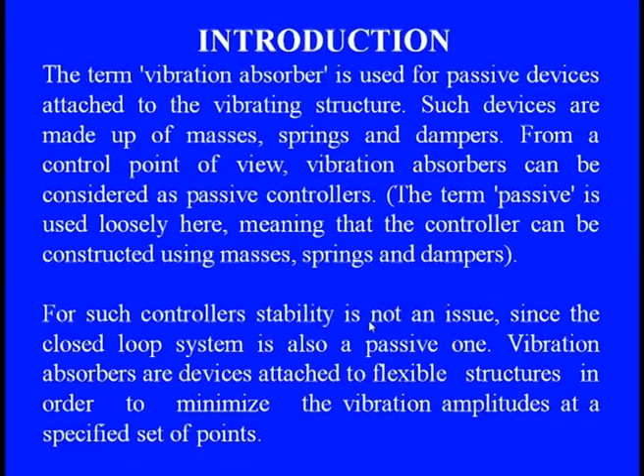Vibration absorbers are devices attached to a flexible structure in order to minimize the vibration amplitude at specific points or a specific set of features. So when we are striking a localized region of the machine or an object, these passive structures which are added there are effective, and through this system we can at least suppress or absorb the energy of the vibration.

The design of this vibration absorber has a long history, starting in the early 20th century with Den Hartog. He introduced the idea that was proposed by Frahm, one of the scientists, who asked why we can't adopt these things to suppress vibration. He simply assumed a second mass-spring device which is attached to the main device.

In this model, there was already a system, and a mass and spring is to be attached there. It simply prevents vibration at the frequency of the sinusoidal forcing from the main device. So this mass-spring is put in place to eliminate whatever vibration features or transmission is coming from the machine to other parts of the system.

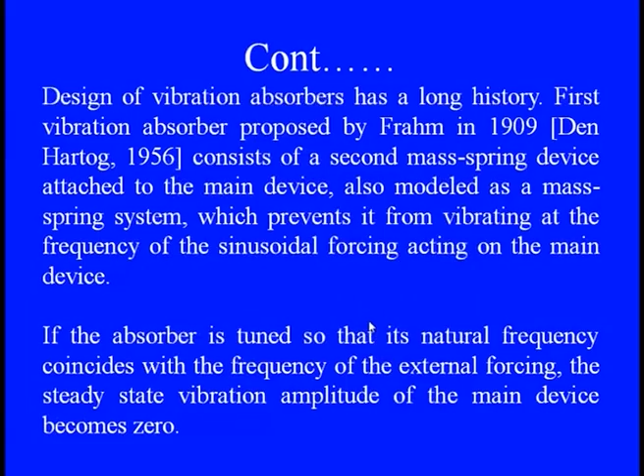If the absorber is tuned, that is one of its specific properties. If this absorber is exactly tuned so that its natural frequency coincides with the frequency of the external forcing, the steady state vibration amplitude of the main device becomes almost zero, because then the entire energy goes to the absorber since it is now tuned with the entire system's frequency.

When we think from the controls perspective, the absorber acts like a controller that has an internal model of the disturbance, which therefore cancels the effect of the disturbance outside.

This is one of the basic mechanisms working from the absorber to the device, because whatever internal disturbances are there, when resonant conditions appear, it clearly absorbs the entire amount of energy being transferred from the main device.

The vibrating system generally consists of a mass linked to the structure by a spring and a damper, and the vibration absorber is set up in such a way that the mass can vibrate at a specific frequency close to the main structure, which I am going to show you in the next slide.

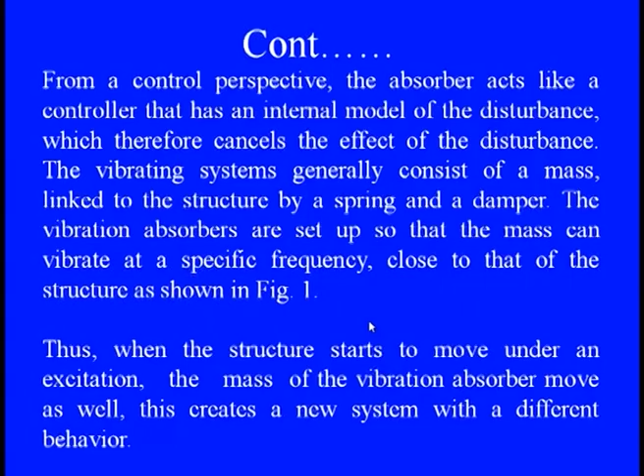When the structure starts to move under excitation, the mass of the vibration absorber also moves with the same structure, and this creates a new system with a different behavior.

As you can see, when the entire absorber covers the mass and spring and is attached to the basic system, whatever forcing frequencies are there, like f sin omega t or cos omega t, it goes straight toward the absorber part, which consists of the mass and spring together, the undamped system.

So whatever frequency is there from the exciting system goes toward the attached absorber mass, and when they are tuned to each other, the entire energy is absorbed by the absorber mass.

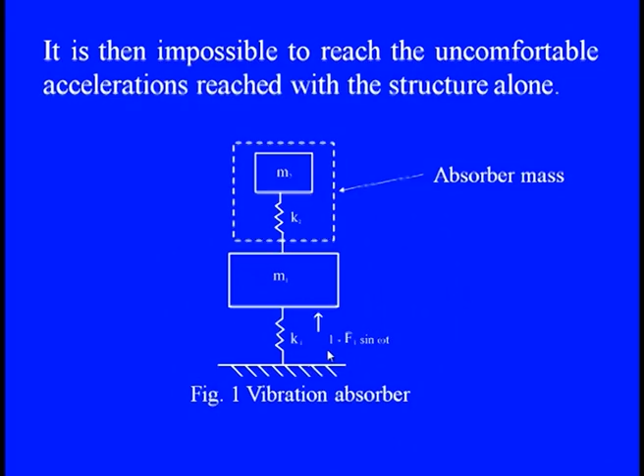So it is then impossible to reach an uncomfortable acceleration within the structure alone. This is the basic concept of the vibration absorber, which is attached to the basic structure.

When there is a main machine or main component, the vibrating mass which is under a sinusoidal force, say f0 sin omega t, acts on the undamped system in which the mass and spring are present.

We can say that when the forcing frequency equals the natural frequency of the main mass where the force is being exerted, the response is infinite because of the resonant feature. When these situations occur, we know that severe vibrations are produced.

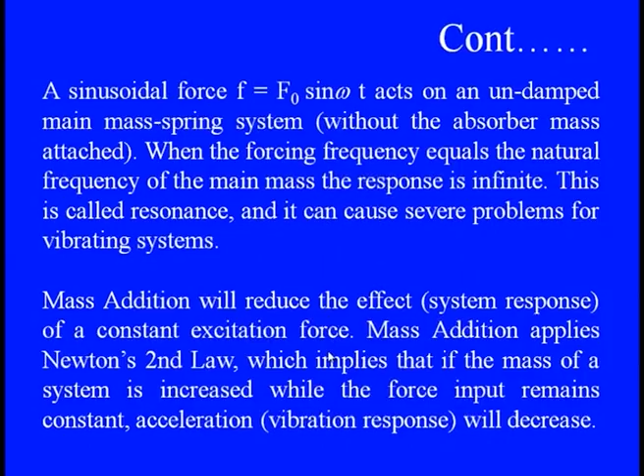So when we are adding mass to the system just to reduce the effect of this vibration, at the same excitation forces, this particular mass through whatever attachment is there through the spring is absorbing the entire energy according to Newton's second law, which says that if the mass of the system is increased while the force input is the same, then the acceleration will decrease, since force equals mass into acceleration.

We know that we are not changing the mass at the point in time when the force is acting and the excitation is coming. But on the other hand, with the same force, when we simply add mass, certainly the acceleration should be reduced. So when such things happen, we can straightaway use this increase of mass feature.

So when an absorbing mass-spring system is attached to the main mass, the resonance of the absorber is tuned with the main mass, and the motion of the main mass almost reaches zero at the resonant frequency. That means whatever energy or excitation amplitude is created at the resonant condition is absolutely absorbed by the attached spring and mass.

And the energy of the main mass is apparently absorbed by this tuned dynamic absorber feature. This is one of the interesting phenomena in the motion of the absorber, and we can say that at the resonant frequency these absorbers show their finite behavior under the steady state feature in absorbing the entire energy.

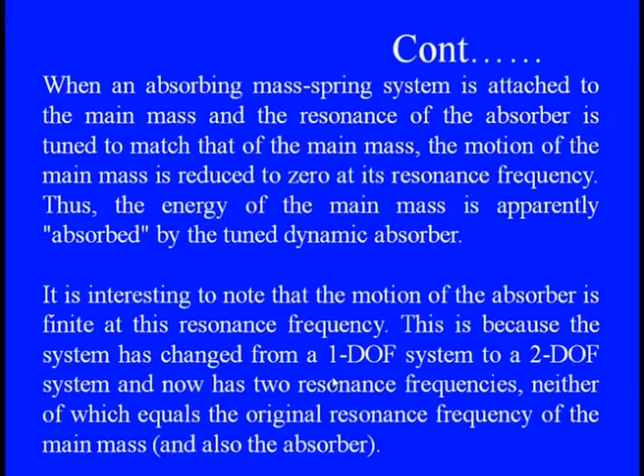And it is so because we know that when the system changes from 1 degree of freedom, with the single mass, to 2 degrees of freedom when the mass and spring are attached, now there are two resonant frequencies, and neither of them is equal to the original resonance. So when there is a shift in frequency, the resonant feature of the entire system, converted from single degree to 2 degree, is brought down.

So this is the basic physics in vibration: when something is added as mass and is tuned to the basic system, the entire system frequency is shifted, as per Newton's second law.

In such devices, which have this inherent nature because of their rotation and other components, we need to add these kinds of masses just to shift the frequency and control the entire vibration by tuning the additional mass.

But with low natural frequency isolation, when we are trying to isolate a system that excites at low frequency, this isolation requires a large deflection isolator such as a soft spring. And the soft spring can be used to control the vibration, which can then lead to some rocking motion, because ultimately that energy has to be exchanged. So that is not always acceptable.

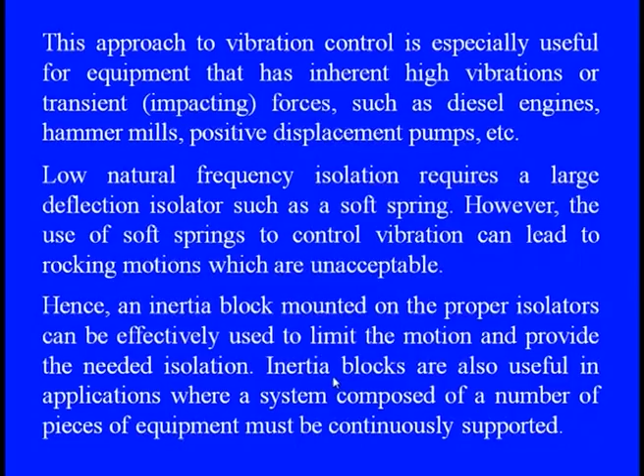So inertia blocks are always useful in applications where the system is composed of a number of pieces of equipment, and they continuously support the entire system for vibration generation, and even in the transmission they continuously play their key role.

So, like we are saying, there is one example in which various such things are there, and we want these small masses to be settled in a continuous way.

So inertia blocks need to be put in place because they lower the center of gravity, and once they lower the center of gravity, we know that the axis of rotation and the moment of inertia axis settle down.

This offers some additional feature of stability, and by increasing the mass, they decrease the vibration amplitude, and also decrease the rocking or exciting feature of the entire system. Due to this, there is a minimization of alignment errors because of the inherent stiffness of the base. So we can say they are also acting as a noise barrier between the floor on which they are mounted and the equipment to which they are coupled.

So when we talk about this system in which the isolator or absorber is present, acting as an inertia block, and also as the vibration controller while maintaining stability, we can write the equation of motion as m1 x1 double dot, which is the inertia force due to the vibrating mass, and k1 x1 and k2 (x1 minus x2).

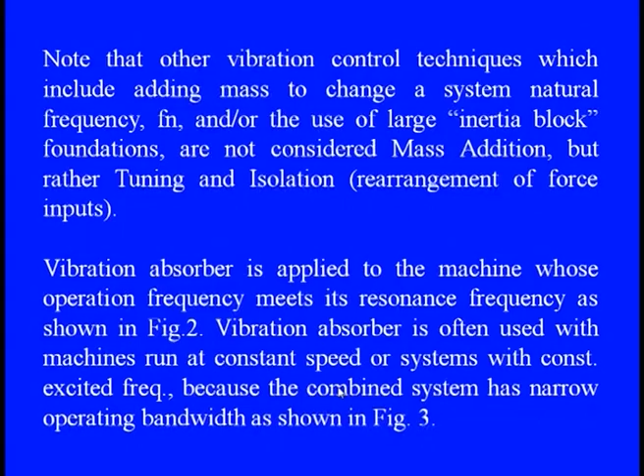We can generally put a damper or shift the mass, just to shift the frequency by adding inertia blocks. A vibration absorber is often used with machines which run at constant speed or with a constant exciting frequency, because combining the system gives a narrow operating bandwidth at this part.

So this is what you see, one of the basic features. When we are just talking about the mass spring system, we know that it is a single degree of freedom system and we have one undamped natural frequency. And every time you see this frequency generating in the machine, we can straightaway adopt this vibration absorber.

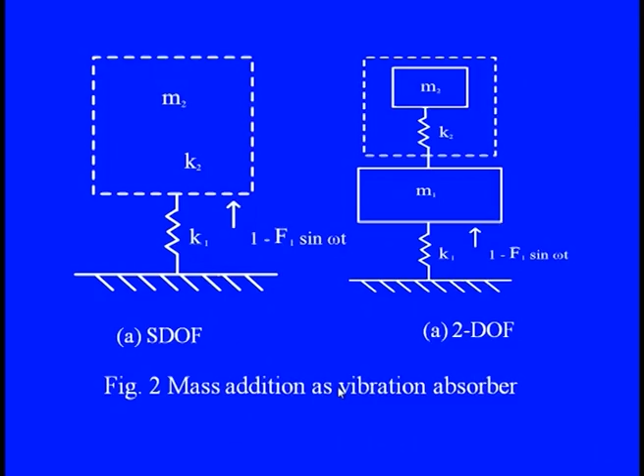In terms of the inertia block, put it or mount it on the system, and when these absorbers are just tuned to the basic vibration system, because now we have the 2 degrees of freedom system as you can see on your screen, then certainly these absorbers are perfect in controlling the vibration by just shifting the frequency, and at the same time the energy absorption can be effectively done at the excitation source.

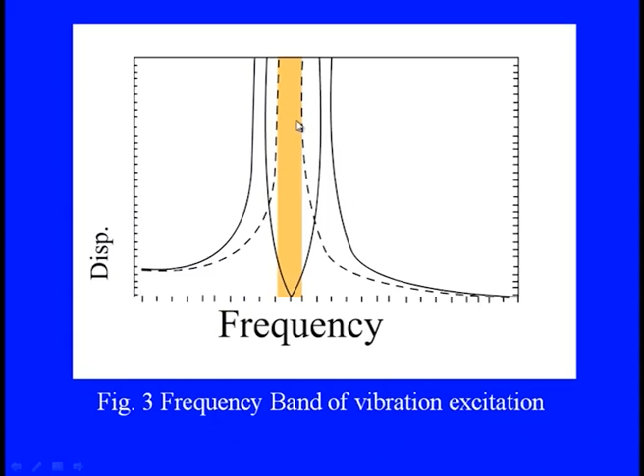And then you see here, all this frequency band in which the excitation or vibrations are there, it can be immediately absorbed during that time.

So if you just look at it from the mathematical point of view, we are converting a single degree of freedom system to a 2 degrees of freedom system. We can say that the inertia block which is to be added to the entire system as the vibration absorber, then the equation is m1 0 and 0 m2.

x1 double dot, x2 double dot, and then the stiffness matrix which should be symmetric along the diagonal, then it is k1 plus k2, minus k1, and we can say that this is my x1, x2, and whatever the force which is being exerted on the main machine, so it is f0 sin omega t.

So when the system is excited due to the harmonic excitation as f0 sin omega t, we know that the input function for the displacement is x1 sin omega t, and the displacement feature for the other mass is also x2 sin omega t.

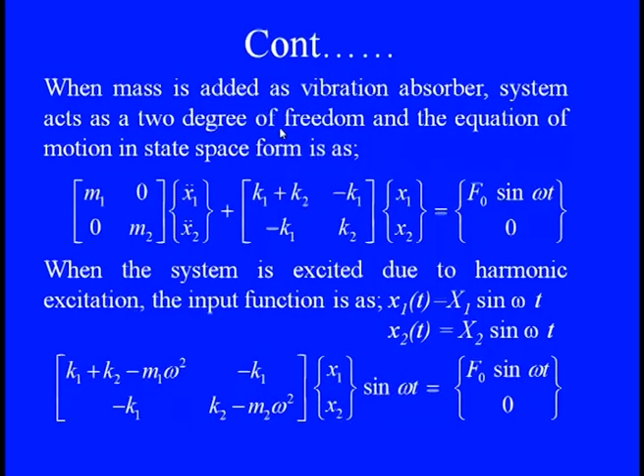So when we are trying to solve it for the natural frequency and eigenvectors, we know that we need to arrange the matrix in such a way that the determinant of minus omega square m plus k becomes 0, and then we can simply get these equations.

So when we are talking about the eigenvectors x1, x2, it is nothing but equals to f0 and 0, that is my force matrix, and the displacement into minus m omega square plus k. So it is k1 plus k2 minus m1 omega square, minus k1, and then k2 minus m2 omega square inverse, or we can say it equals 1 by delta.

k1 plus k2 minus m omega square, minus k1, and then it is k2 minus m2 omega square inverse. So we are now trying to change it in such a way that f0, which is the input feature, and x, which we just want to see here as the outcome feature, relate in that way.

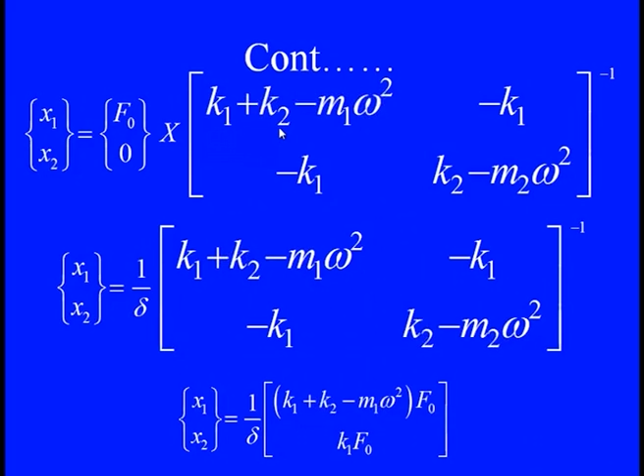So we can say finally x1, x2 is nothing but equals to 1 by delta, k1 plus k2 minus m omega square f0, and k1 f0. So when we are trying to calculate delta, it is nothing but equals to, when we open the matrices, k1 plus k2 minus m omega square, and k2 minus m2 omega square, minus k2 square.

So we now have both the modes x1 and x2. x1 is nothing but equals to k1 plus k2 minus m omega square f0 by delta, and x2 is k2 f0 by delta.

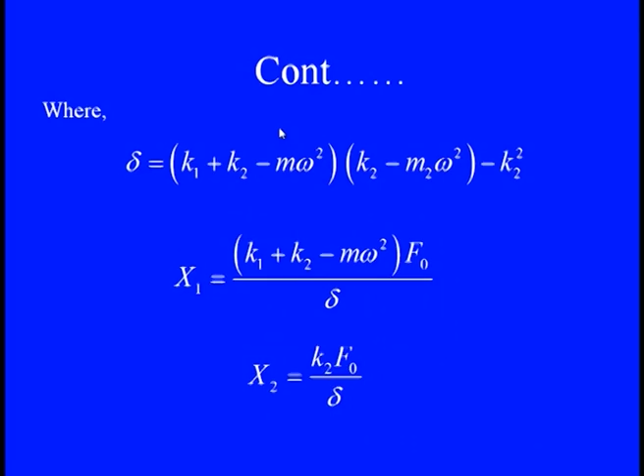So now we see that m2 and k2, the added mass and spring, when tuned in such a way that the overall displacement is 0. So if x equals 0, it is only when omega square equals k2 by m2. So the motion of absorber mass, xa of t, equals minus f0 by ka sin omega t, where xa equals minus f0 by ka. Since it is the absorbing part, it is minus.

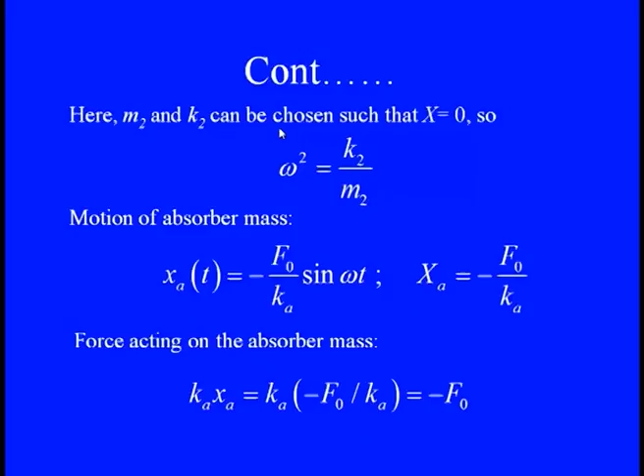And the force acting on the absorbing mass, transmitted through the main mass, equals ka times xa, which equals ka times minus f0 by ka. Replacing this, it is nothing but minus f0. So the total force is being transmitted to the absorbing mass, and the force provided by m2, which is the disturbing force f0, when it is there.

So the net force acting on the primary mass is zero, meaning the entire force is transferred to the added mass. There the displacement x equals ka minus ma omega square times f0, divided by the total stiffness: k plus ka minus m omega square into ka minus ma omega square minus k square.

So this is the arrangement showing the interaction of the stiffness features of the main mass and the added mass, and also how the mass variations come in when we compute the relative displacement. We have two main frequencies.

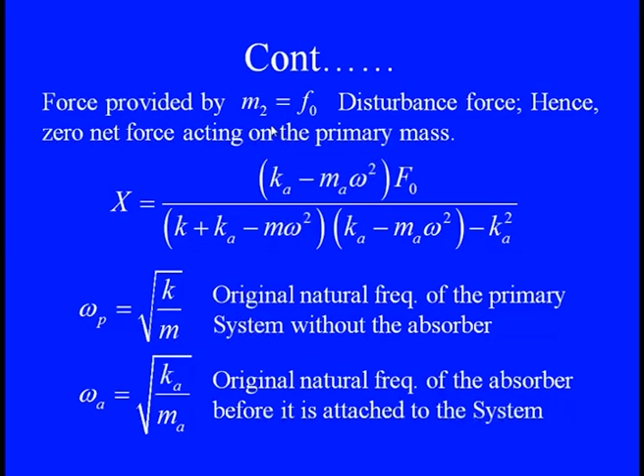One is the main frequency, which is the original natural frequency, square root of k by m, the primary system frequency without the absorber. But when the absorber is added, the frequency with the absorber is omega a, which equals square root of ka by ma.

So we have two frequencies, omega p and omega a. We define a mass ratio mu equals ma by m. And there is a frequency ratio between omega a and omega p, meaning omega absorber versus without absorber, or the ratio of omega to omega a. Omega is the overall frequency of the system, and omega a is the absorber mass feature.

Then we define the normalized displacement of the primary mass, the primary feature without the absorber, as x k divided by f0. This is the transmission feature, where x is the output and f0 is the input, equal to the modulus of the normalized expression: 1 minus r square, where r is the frequency ratio omega by omega a, divided by 1 plus mu times beta square minus r square, and 1 minus r square minus mu beta square.

So this is the normalized displacement of the primary mass when the added mass is there, acting as a suppression feature of passive vibration control.

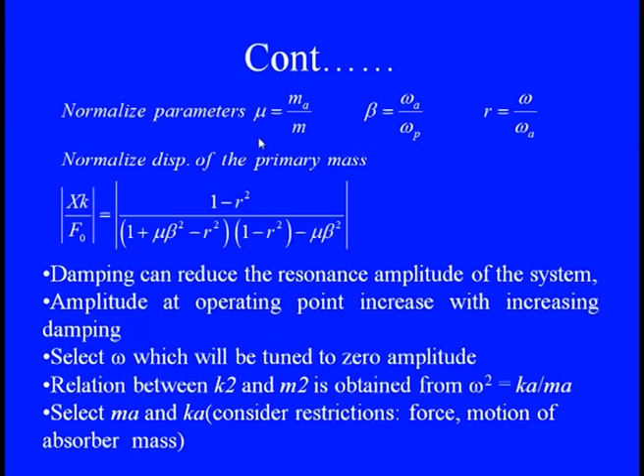This is the natural frequency, where there is no excitation. That means the added mass is a perfect absorber at that point, and the entire amplitude is being washed out.

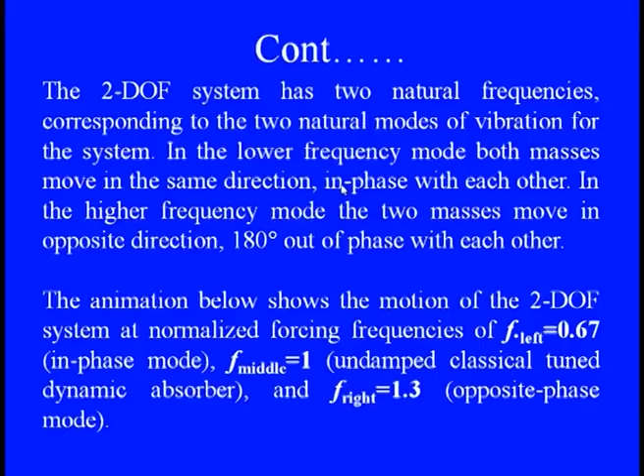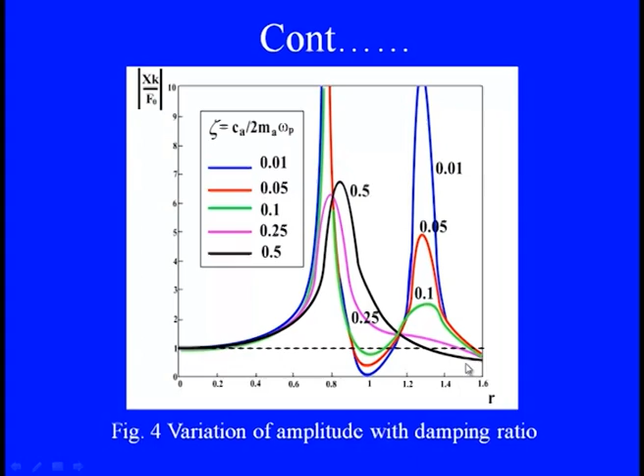So when such systems are there, it becomes somewhat drastic to control the things. We can say the 2 degree of freedom system has normalized forcing frequencies: when in phase it's just 0.67, and when out of phase, with opposite modes, it's crossing 1.3. 0.67 is clearly shown here, and 1.3 when things vary in that way.

When you look at the undamped classical tuned system, where damping is not available at that point, it is almost nearly equal to 1. Then when the damping ratio is ineffective, the things become almost 0 there.

So in such a system, when we are simply adding inertia blocks to suppress vibration and damping is involved, we need to check whether the masses, since it's now a 2 degree of freedom system, are in phase or out of phase. When damping is not an effective part, or not present, the suppression of vibration through this inertia block absolutely occurs at omega by omega a equals to 1.

We can say that the magnitude and phase at which force is being applied to the main mass are clearly shown in these parts, showing how the variations occur. When damping is achieved at the same time, there is a clear reduction in the level of vibration, so we can perform vibration suppression at points other than omega by omega a equals to 1.

So at the lower frequency, around 0.667, or the higher frequency 1.3, the damping can also act along with the added mass.

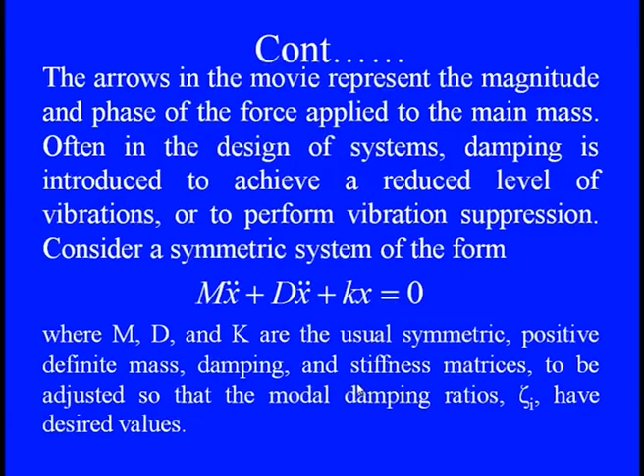So when we consider the symmetric system, we have m x double dot plus d x dot plus k x equals to 0. When we add these terms, we know that the mass, damping, or stiffness matrices can be straightaway adjusted so that the modal damping ratio gets the desired value required to suppress the vibration.

So we can say that it is simply providing insight into how to adjust or design individual elements like the mass, spring, or damper in such a way that we can achieve the desired damping ratio for the system. When we are doing this, especially for the mechanical part, the damping in the structure is specified in terms of either a value for the loss factor, due to the stationary or non-stationary part, or the percentage of critical damping can also be given as the damping ratio.

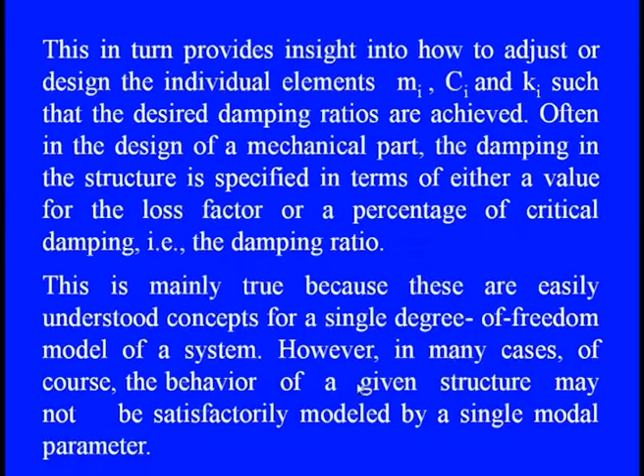We can say that when we are just trying for a single degree of freedom system or 2 degrees of freedom system, the things are quite feasible along with these parametric features - mass, damping, or stiffness. However, in many cases, the behavior of the given structure is not satisfactorily modeled when we just go with the single degree of freedom. So in such cases we need to go for higher degrees, like an n degree of freedom system.

Which has the nth damping ratio, say zeta n, and these damping ratios are for all the normal modes which are present. Under the symmetricity of the matrices - the damping matrix, mass inverse matrix, and the stiffness matrix which is symmetrical - we get all these damping ratios according to their normal modes. So if we are just decoupling the motion, then the damping ratio zeta can be defined as lambda i of D divided by 2 omega i.

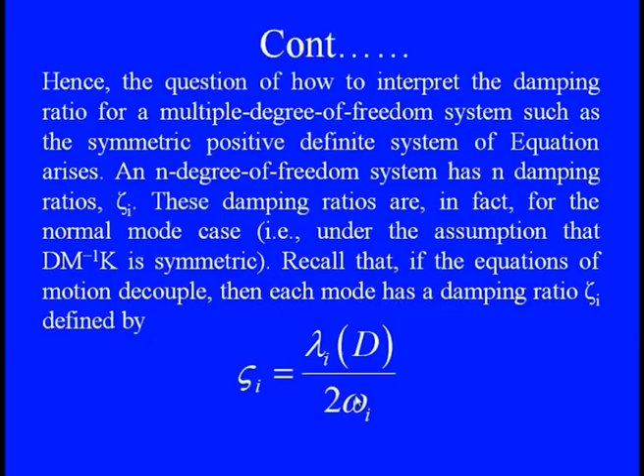So what do we have here? We have two features in this: one, the lambda, that is the eigenvalue, along with the rotational frequencies, and with these frequency ratios we can say that zeta, which is nothing but the damping ratio, can be defined for the system. We know that omega i, in the denominator, is the undamped natural frequency of the system, and lambda i is also showing the eigenvalue of the matrix along with the damping. This ratio clearly shows the effect of the damping.

So when we want to formalize this, we can say the definition is to examine the normal modes, just to evaluate whether the damping, inverse mass matrix, and the stiffness is symmetric or not. If it is symmetric, then we can say that damping, inverse mass matrix, and K is absolutely equal to the stiffness, inverse mass, and damping part.

But if it is not, for any normalized case, then the damping ratio matrix can be defined, as we already discussed, by Z, and in this way we need to define Z in terms of the critical damping matrices, as discussed in the previous lectures, D critical. So here the D critical is playing a key role in defining the normal mode, other than the symmetricity, we can simply define the damping ratio Z equals to D critical to the power minus half, D, D critical to the power minus half.

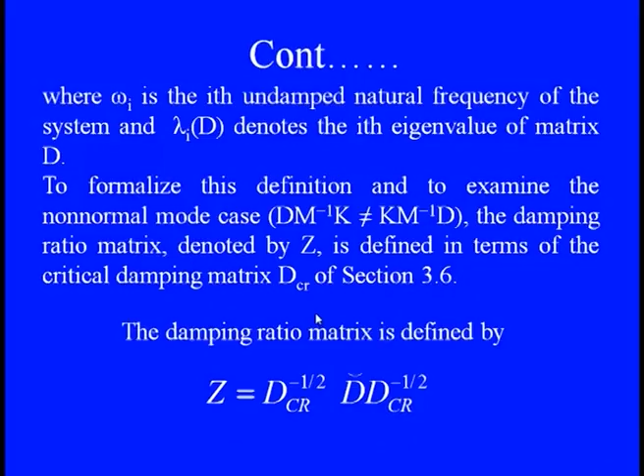So when you have the normalized mode in a symmetric way with damping, inverse mass, and stiffness, there is no problem - we can straightaway go zeta equals lambda i d divided by omega i. But if we want to examine the nonnormal mode for different cases in which the symmetricity of this matrix - damping, inverse mass, and stiffness - is not symmetric, then we need to go with the damping ratio along with the critical damping.

And when we are trying to formulate this, we know that D critical and D bar, which is nothing but the normalized damping matrix with the mass for any structure, we can simply calculate the matrix for the damping ratio Z, and the eigenvalues of this can be immediately found along the diagonal of the entire Z. So if we want to calculate the eigenvalue, Z' is nothing but equal to the diagonal along the entire Z matrix, and it is lambda i into Z, or we can say it is sometimes the diagonal of the zeta star.

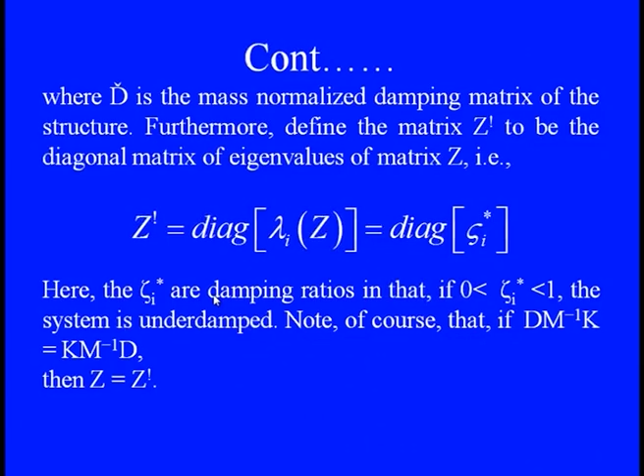The zeta star is nothing but the damping ratio for such a system in which the ratio di divided by omega I is less than 1, meaning it is for the underdamped system. When you have the underdamped system and want to calculate the damping ratio, we need to go with the diagonal matrix of the entire Z matrix. But when the system is symmetric, say D m inverse k equals k m inverse D, we can simply calculate using omega I or lambda I directly. So from this consideration, it is apparent that one can bring about the reflection

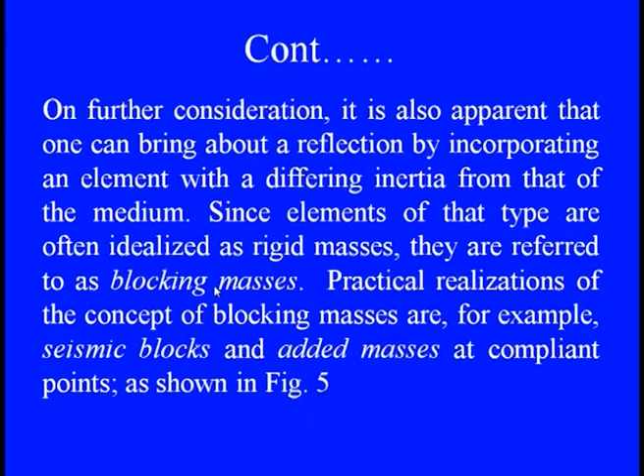by incorporating an element with a different inertia from that same medium where the excitations are there. Since elements of that type are often idealized as rigid masses, we can say they are simply blocking masses. With these practical applications and realization of the entire system, the blocking masses concept can be immediately adopted according to seismic blocks and added masses.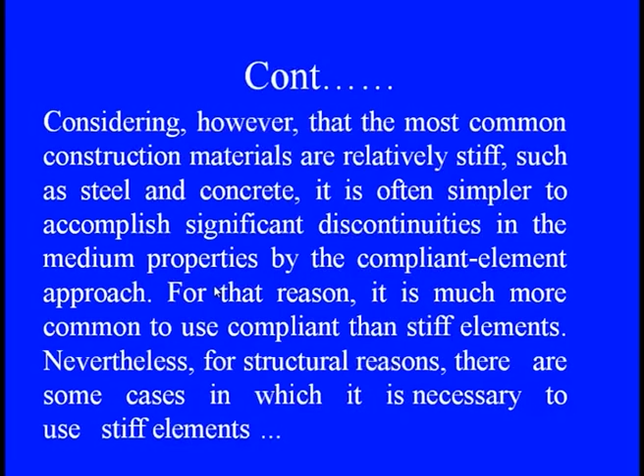When we are making the added mass or seismic masses, the construction materials, because they are more stiff, can be straightaway accommodated as steel or concrete, and they can be put on this particular path just to provide significant discontinuities in the medium properties by adopting a compliant element approach. For that reason, it is much more common to use a compliant element than a stiff one, though for structural reasons they sometimes say we need to go with more stiff material than the flexible one.

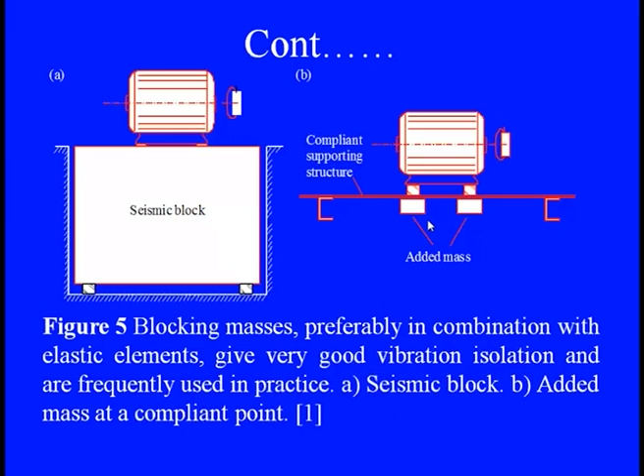So here we have a seismic block, and this added mass on the entire system can suppress the entire vibrations, but we need to check out the compliant structure support. These added masses, when perfect, can provide a better solution according to the space, just to absorb the vibration excitation feature here.

So lastly, when we are trying to design vibration isolators, there are a number of thumb rules. First, for the isolator of static nature, we need to check that the stiffness of that isolator must be chosen so low that the highest mounting resonance can fall far below the lowest interesting exciting frequency coming on the system due to the interaction feature, according to this stiffness feature.

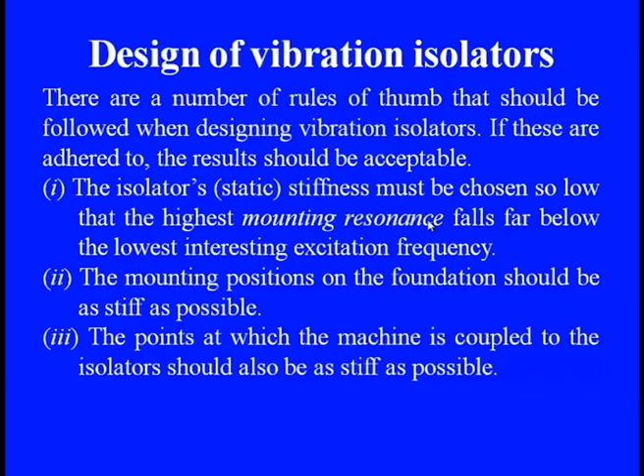Second, the mounting position on the foundation should be as stiff as possible, so that the robustness between the added feature can come about. The point at which the machine is coupled to the isolator should also be as stiff as possible, so that the coupling can be done perfectly, and whatever energy is being dissipated during that point, the coupled feature can immediately act as the absorber or stiffener feature.

So these are the critical rules for designing vibration isolators, whether we are considering mounting resonances, excitation features from the machine, or even the location point of view. When talking about the second case, the mounting position, or the third case, the coupled feature, they are not difficult to fulfill at lower frequency, but at higher frequency the internal resonances are always creating so many problems within the material itself.

The isolator should be designed in such a way that the first internal anti-resonance falls well above the highest exciting energy of the entire machine. So when we are designing the isolator, we need to take care of what could be the possible way to place the anti-resonance frequencies, such that all the exciting frequencies are well lower than the anti-resonances.

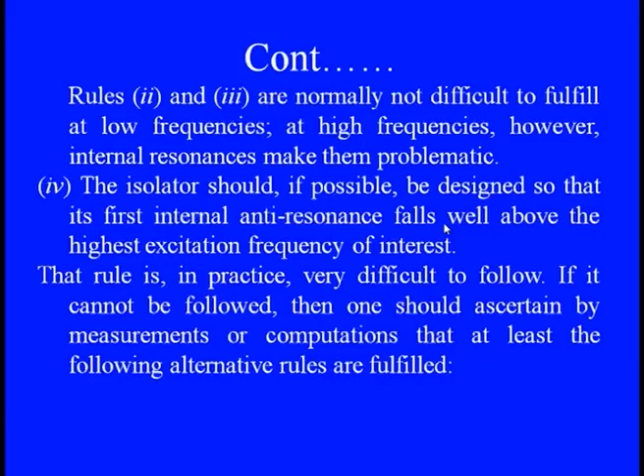This rule in practice is very difficult to follow, but if you are not trying to follow these things, then we can simply calculate or measure so that the added mass or anything, the isolator can be put in such a way that the anti-resonant part comes immediately above the highest excitation frequencies. So either practically or through computations, we need to check out the feasible way to design the best possible vibration isolators.

When we are talking about the isolator, it must be designed in such a way that internal resonances should not coincide with the strong component of the excitation. Otherwise, in the spectrum the entire feature will come out, and it may even supply energy to make the system lead towards the unstable part.

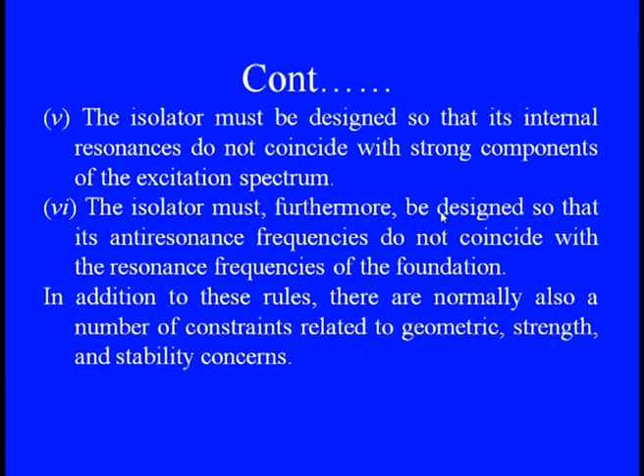So the isolator must be designed so that its anti-resonance frequencies do not coincide with the resonant frequency of the foundation. In addition to these rules, there are normally a number of constraints which can be adopted according to the geometry, stability, or strength point of view of the structure, because the local features, operating conditions, and environmental features also play a critical role in designing the isolators.

If we are talking about the entire chapter, we could easily figure out that when designing the absorber, there are various ways through which we can straightaway adopt a best suited method, like simply adopting a spring. Then what kind of springs are there? By adopting the damper, or an integrated effect of damping and stiffness, or even when we are trying to bifurcate the degrees of freedom from 1 degree to 2 degree, and then the corresponding shift is there in frequency, from 1 natural frequency to 2 natural frequencies.

And when we tune our added mass, or sometimes what we call the seismic mass, to the exciting frequency of the main part, then we know that we can lead the entire vibrating system, the main mass, towards zero amplitude. So these are the best possible ways through which we can design our absorber according to the condition and according to whatever the exciting features are from the machines.